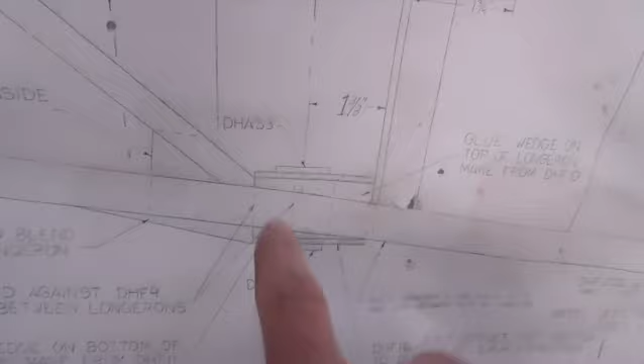If you look on the plans here, the plans want you to cut that long piece so it fits between the longerons and then glue a wedge on top of the longeron to make it level and put a wedge on the bottom. I'll still have to put the wedge on the bottom, but I've kept this cross member long enough so that it's outside to the edge of the longeron, and then I'm just going to dado cut that into it, and then it'll just fit right on top.

I will have to put that little wedge on the bottom part, but the top part is all one piece of wood going through there. So you see here how it's just one piece of wood, and what I'll do is just cut it out right here up to the level that I've got marked there, and then that will fit right down inside there. So I won't have to make a wedge on the top, which should make that whole piece stronger, because before you're just glued between the longerons. This you're actually sitting right on the longeron.

All right, I'll let you see what happens. And by the power of video, there you have it. So the bottom is right flush there according to the plans, and I just cut that little groove out of there. It fits right on there on both ends. It's right up against this, which is directly straight down because that's a 90-degree, level across the top, level here, level there.

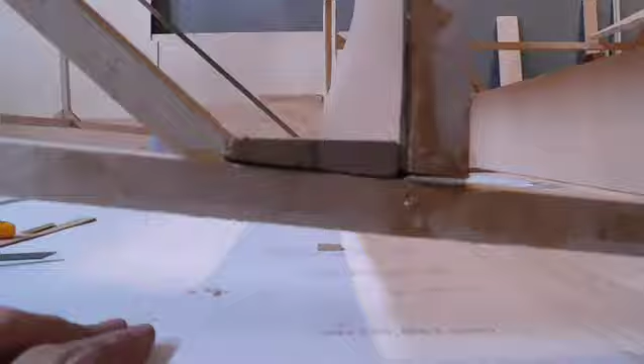So that's what I did. And I think that's a better solution than cutting it flush, putting it between the longerons, and then just putting a wedge in there. All right. What still has to come there, there's a little bit of a wedge right here that I'm going to put on there. Where am I? Right there, you can see a tiny little wedge, and then that gets wedged down to be level.

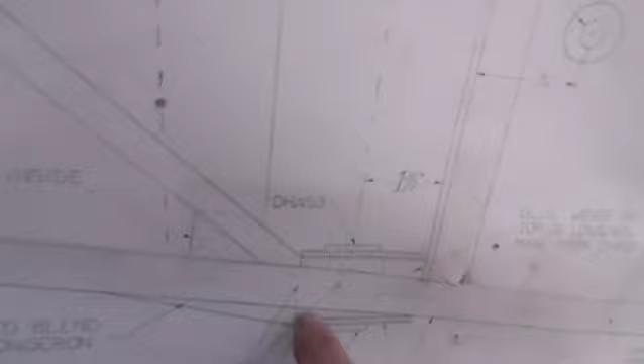Where am I? Little tiny wedge there, and then a little tiny wedge coming down so that the bottom longeron is nice and smooth all the way through there, as per plans here. You got a little wedge right there. Once you get the wedge on here, then you've got the 1/8 ply. And then you've got your bottom metal cross member that goes all the way to the other side there. And then just a wedge so that that's nice and smooth with the longeron all the way across there. All right, that worked out better than I thought.